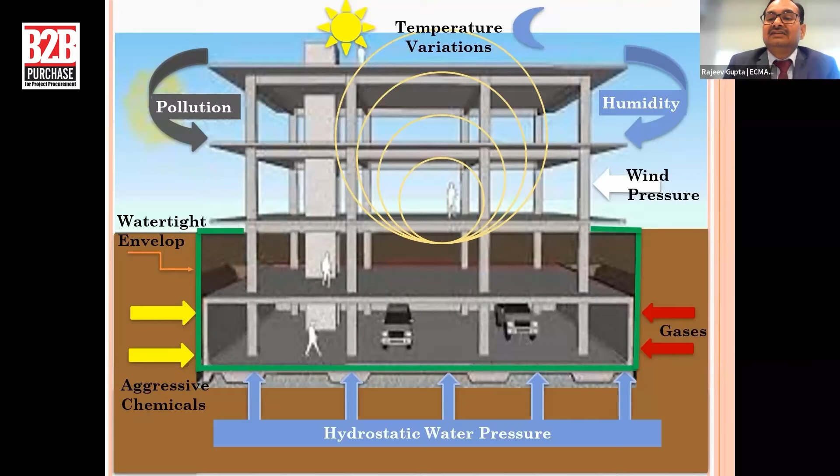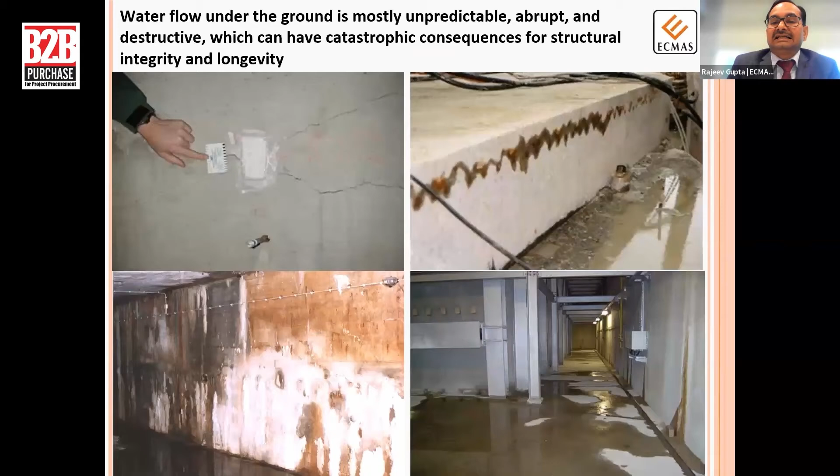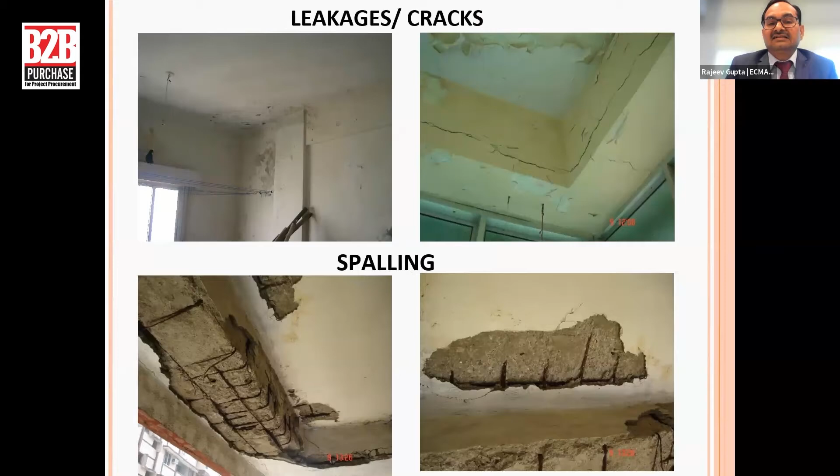Some of the pictures I am showing are a common concern for everyone: efflorescence, rising dampness, water leakages, cracks, spalling of the concrete, corrosion of the steel. Some of these are related to aesthetics and many are related to the structural part of the structure. These are all signs of early deterioration.

So durability and sustainability of construction is really very important because various factors are directly linked, be it economic reasons, safety concerns, environmental impact, utilization of natural resources, and health hazards. All are directly linked with the durability and sustainability of our construction.

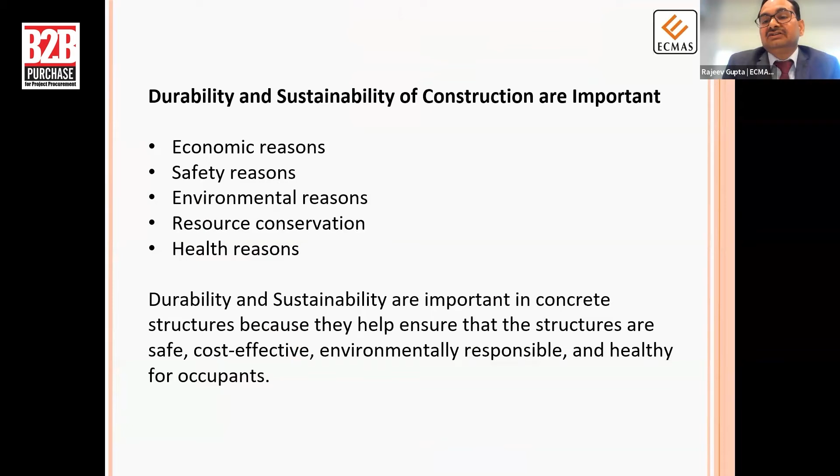There are some key factors which affect the durability of concrete structures. One of the most important is corrosion of steel reinforcement, which ultimately leads to weakening of the structure and reducing its load bearing capacity. Similarly, abrasion can lead to degradation of the concrete, reducing its durability. Water ingress: there are various ways water can penetrate into the concrete structure, and it ultimately affects the durability.

Then temperature and humidity changes, chemical exposure, and some structural design flaws or defects. These are all responsible for the durability of concrete structures. So it is very important to take these factors into account while designing and constructing any project. Proper use of construction chemicals can definitely help in extending the service life and improving the durability of our construction.

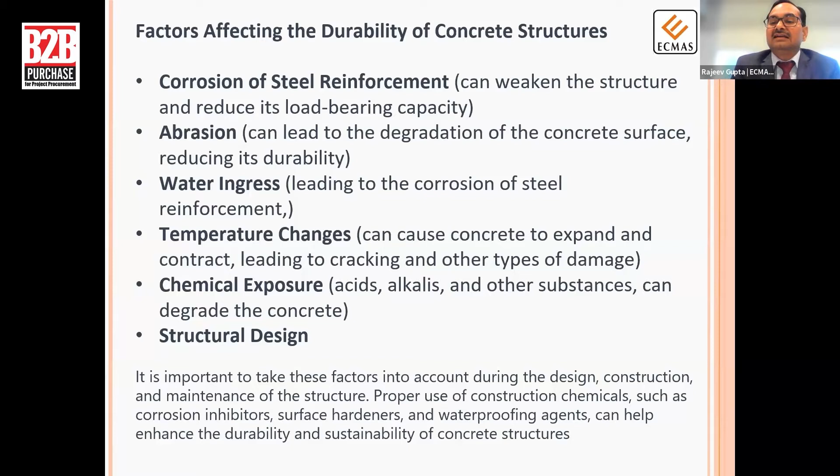Most structures are made of concrete. While producing concrete, two key ingredients are water and cement. Both are very important resources. Using more cement is not desirable. At the same time, using more water is also not desirable, but both are necessary to produce concrete. By using concrete admixtures and various additives, we can reduce the cement content in concrete production, and at the same time, we can also reduce water consumption.

Second, just after construction, we require a lot of water for curing the concrete, and a lot of water gets wasted in the curing process. So instead of water, we can use chemicals like curing compounds, which can really help reduce water consumption during the process. Similarly, use of corrosion inhibitors can help in slowing the corrosion process of the steel reinforcement.

Then there are various waterproofing solutions available, which can act as a barrier and will not allow water ingress into the structure, because water is the biggest enemy of any construction or any structure. Whenever water penetrates into any concrete structure, it leads to the corrosion of the steel and ultimately affects the durability of the construction. So using waterproofing chemicals also helps in extending the service life of structures.

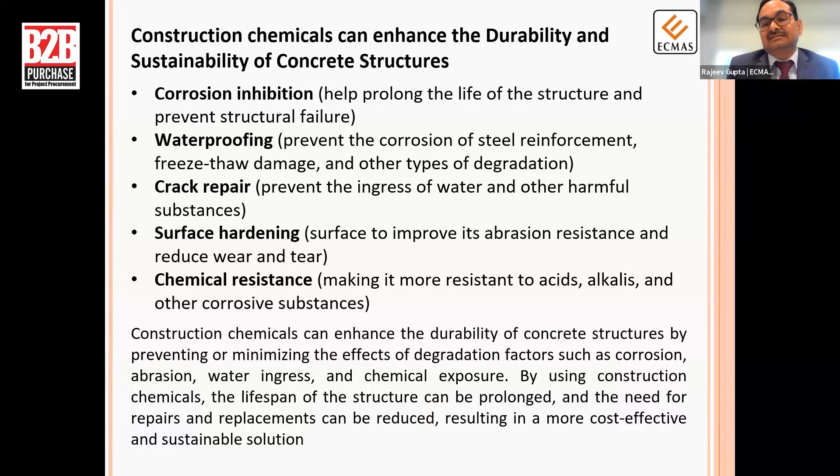There are various kinds of chemicals available which can help in achieving durable construction. But again, durability is one aspect. Another aspect is sustainability. Mr. Abhijit has nicely explained the sustainability part. So when we talk about sustainability, there is a growing movement towards adopting green building practices and achieving more efficiency, more durability and sustainability in our construction.

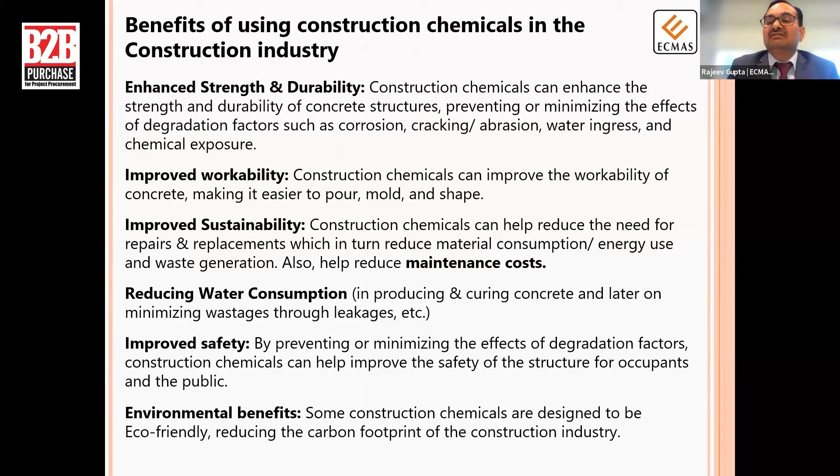So when we talk about sustainability, two things. One is minimizing the energy consumption in the construction and after construction also. There are two types of energy consumption involved in any construction or in buildings, basically. One is energy consumed in construction of the structure, meaning producing the materials, transporting the materials, and during the construction. Second is operating the buildings, with air conditioning, cooling, heating, lighting. All these use a lot of energy.

There is a growing concern about minimizing the use of energy in buildings to move towards sustainability. If you look at any building, almost 40% of energy is used in the buildings only. Of that, almost 55% is used in air conditioning, in the heating and cooling part only. So there are a lot of construction chemicals which can help insulating the buildings, creating energy efficient building envelopes, and can help in minimizing or optimizing the energy consumption.

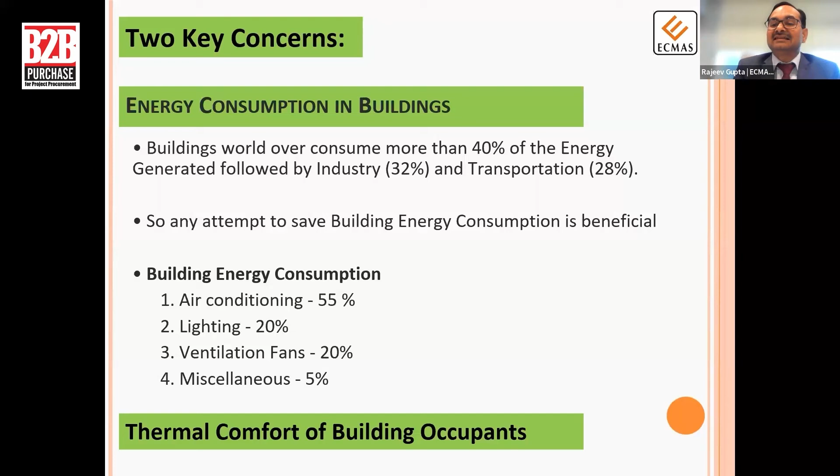Various kinds of cool roof coatings are available, which can help reduce the energy consumption. Not only reducing the energy consumption, they also help in improving the thermal comfort inside the building, which is very, very important for the occupant, whether it is an office or a residence. Maintaining optimum temperature is very, very important to have good mood and good working efficiency. So construction chemicals can definitely help in reducing the energy consumption.

There is another trend: green roofs, living roofs, terrace gardens. That is also a step towards green buildings. When we talk about green roofs or terrace gardens, we really need a good waterproofing system which can sustain continuous exposure to water, exposure to UV rays, exposure to chemicals, exposure to plant roots. Using construction chemicals can definitely help in achieving good waterproofing and maintaining our construction for a long period of time.

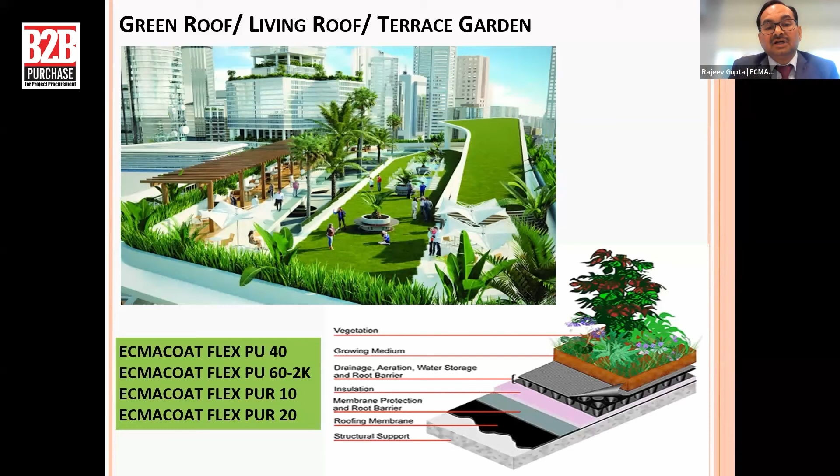So when we talk about green construction materials, we also have to be aware what is green material. The material should be eco-friendly. It should have minimum environmental impact. It should be made of recycled contents. It should be biodegradable in nature. It should have low VOC or zero VOC to avoid health hazards to the workers and to the occupants of the buildings. It should help reduce water consumption, reduce energy consumption, and it should enhance the durability of the construction.

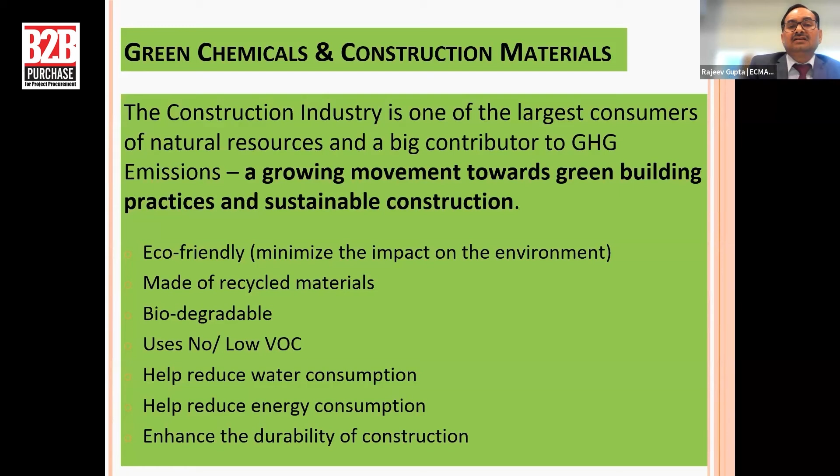So considering all this, within the construction industry, some key trends are developing in procurement also. There is an increased focus on high performance green materials, which provide high performance while having the least environmental impact. There is an increased focus on product sustainability, meaning products made from renewable resources, having low carbon footprints and recyclable content. There is more focus towards life cycle cost.

Instead of product cost. Some products or systems may be cheap initially, but over the life cycle of the construction, they may prove very costly. So we need to adopt solutions which help minimize the overall life cycle cost.

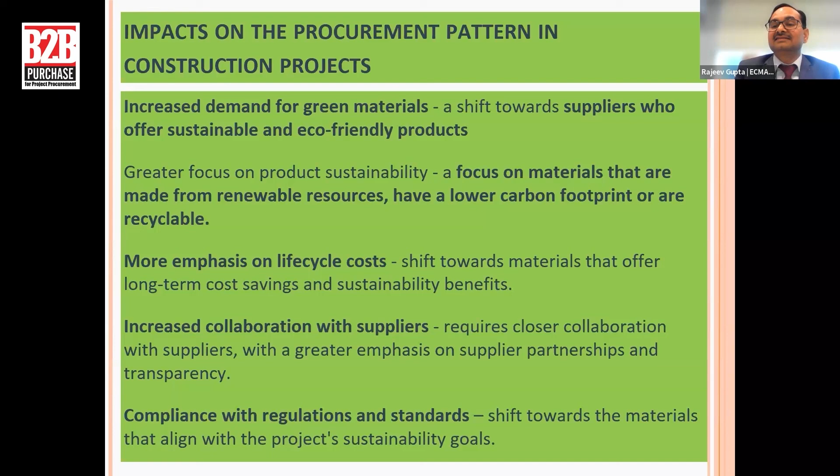Then there is a trend to work very closely with suppliers, because sustainability and high performance products require close working between the actual user and the manufacturers. So closer collaboration with suppliers is very, very important, and compliance with regulations and standards. All these are very important, and already there is a growing awareness and trend in this direction in the construction industry. Thank you.